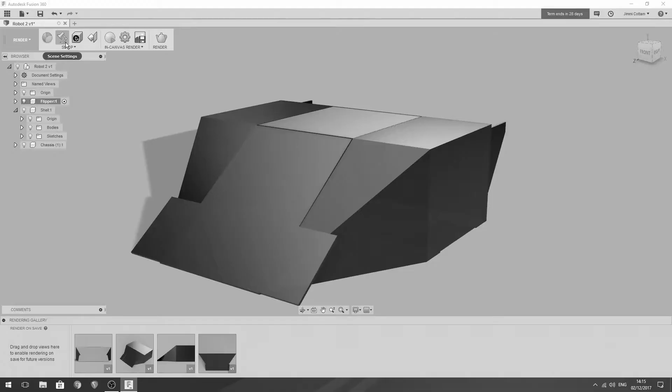Robotic Idiotic was initially created to showcase me designing, building and fighting a Beetleweight fighting robot, and then committing my failures to YouTube. I am, or certainly was at that point, the very bottom of the rung. I had no experience in electronics, very little in mechanical design, and Robotic Idiotic was trying to show anyone that building a robot is easy, or it can be if you know what you're doing.

If we roll back to 2018, regular followers will know that I competed in the European Beetleweight Championships set up by Kinematic Event. Those of you that watched that series know I spent a dismal 12 seconds in the arena against a very powerful horizontal spinner called Spinzer. Of course, the oil barrel armour didn't really stand a chance.

At the end of the very last video in that series, there was a teaser: Volta will return. In January 2019, I started to act upon that. I bought some HDPE, some 10mm thick stuff, and some new wheels - new, grippier, better, easier to use wheels. There is more than one, I'm not just going in one wheel.

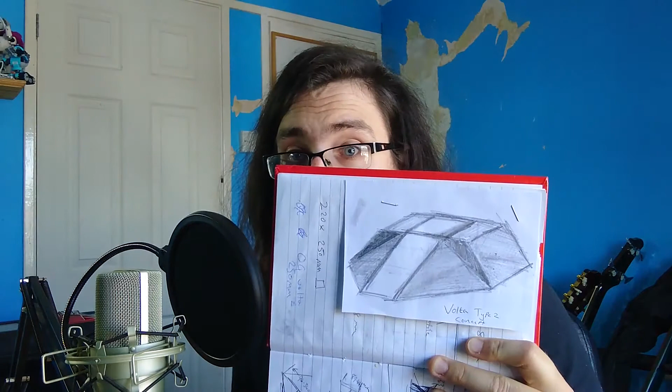Being locked down with no events coming up that I could reasonably get to, and with quite a lot of other events being cancelled this year, I thought I could at least have a decent crack at redesigning Volta, ready for when events do pick up.

In 2018, my limit was October of that year. That was my deadline to get a robot up and running, and although it didn't really work, I did get it into the arena with the help of some very friendly roboteers.

But with this design, I haven't really got a time limit to work towards. I just want it finished, hopefully by next summer. It's kind of like a soft time limit - I'm not aiming for anything in particular.

Now, as we know, Volta was poorly designed originally. I sat down with Fusion 360 to plan it out before I actually build anything. I don't really want to go into making something on paper and it not working when we get to the actual building stage. Ballsing it up is something that I'm quite good at.

That's what we're going to talk about in this episode - how I designed, or redesigned should I say, the new look Volta.

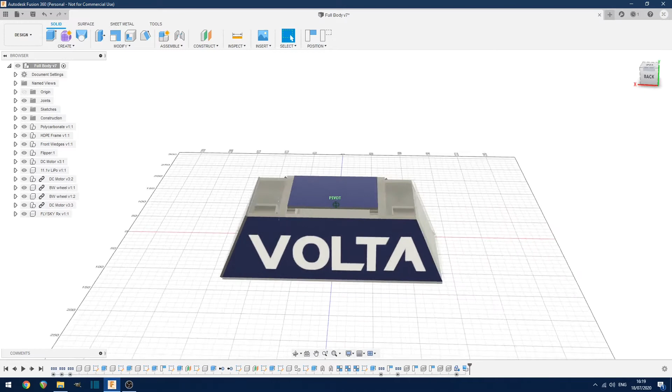This is how Volta looks in accordance to our new, more interesting design sketch that I did in the notebook. It's a little bit rough, it's not 100% amazing, but I wanted to redesign it so I knew all the components fit on the inside first. But we'll go through it and I'll show you how it came to fruition.

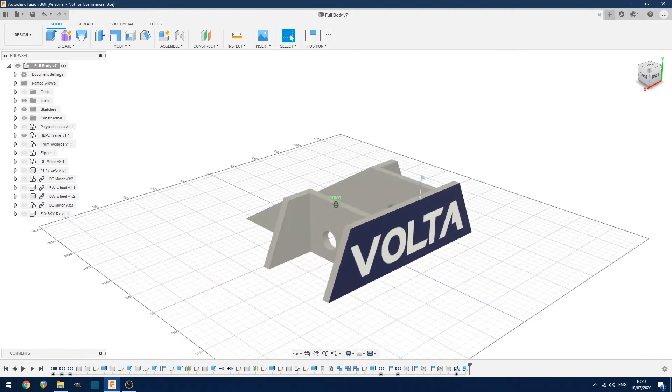Okay, so this is the initial skeleton. These are the HDPE parts that we are going to cut out first, with all the relative holes for adding in the motors and the back of the hinge for the flipper.

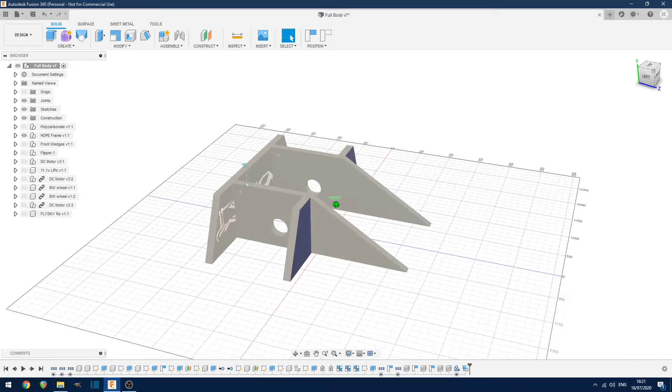As you can see, I am opting for a more angled sort of design. Original Volta was very slab-sided, which didn't really help. It's a little bit wider, but it's still kind of roughly the same design, if a little bit tweaked.

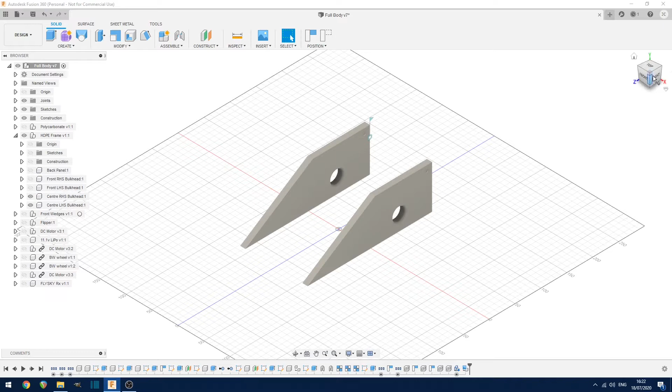I did like the look of Volta initially - it reminded me of a very old school Robot Wars type of competitor. So I designed all the parts first, and they are all individual, so I can actually take away each section and show you a bulkhead by itself. So that's where the motor will sit.

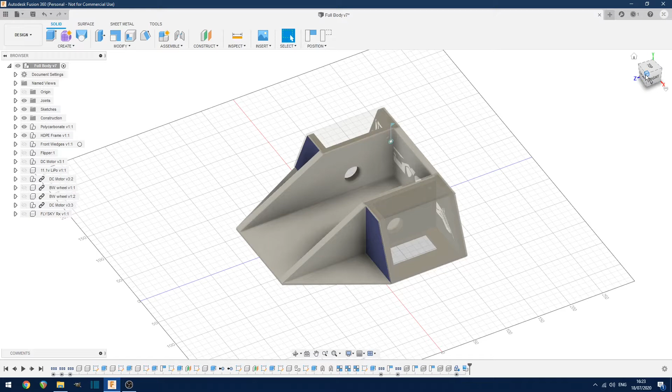The next part, when this was all done, I could add the polycarbonate with the intention of adding polycarb to the side. So we're going to have a nice clear view of the wheels, and we're also going to have LEDs running on the inside to illuminate it from the inside out as part of the power light that we have to have in accordance to the rules. I've got some 3mm polycarb, which is apparently good enough.

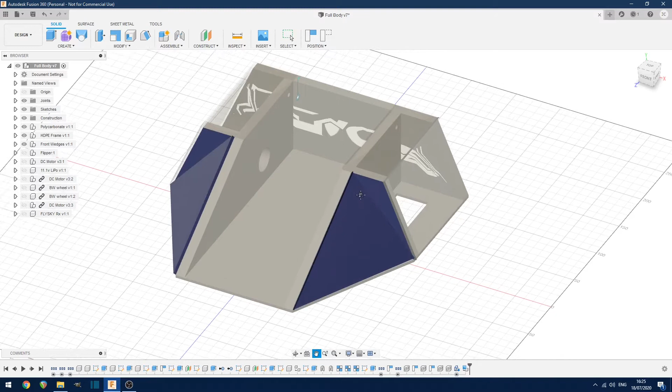The chassis is pretty much identical to the chassis from original Volta. That's going to be 3mm thick polycarb as well. These might be a bit problematic because I'm kind of uncertain how they're going to attach to the HDPE on the sides and to the chassis. I think I might use, again, 3mm HDPE, maybe a bit thicker if I can find it. 3mm is what I went for in the design here.

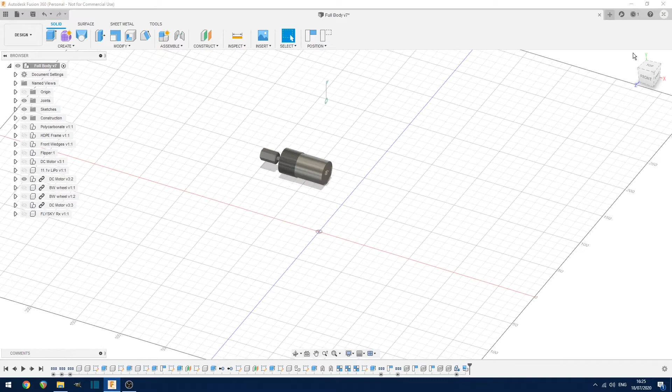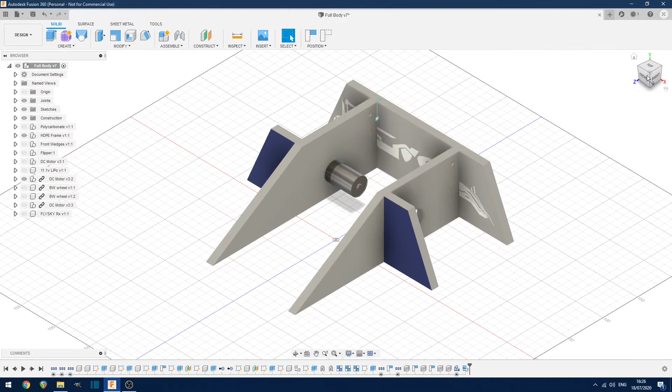Another important thing to talk about - I actually mocked up the DC motor and the hub that I bought, which we'll talk about in another video when I go through the components. I know you can probably find them online, but I did this - I remade the motor to put into our model to make sure that they fit together in the HDPE. So there is actually another one somewhere too.

That gap between the two was a problem, which is why it ended up being a little bit wider. Oh, that's how it looks with the wheels that we've got.

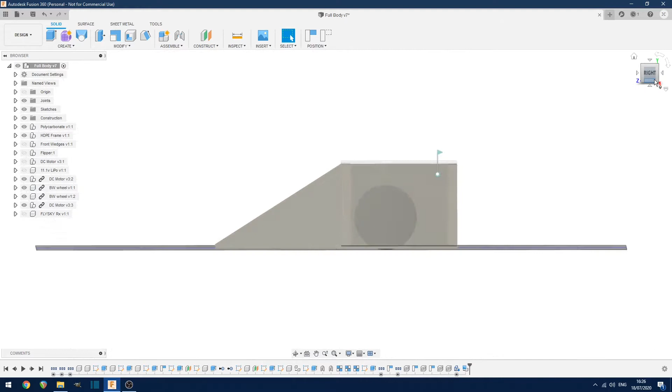With the polycarb, it was important for me to know how high I needed the wheel to ride off the ground. So if everything goes according to plan, when we print out the sheet to apply to the HDPE for me to cut the right size out, the wheel should sit perfectly enough to give enough ground clearance while still keeping the wedge nicely planted to the ground.

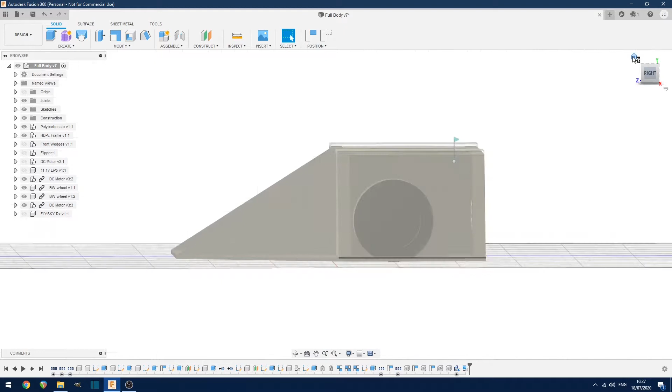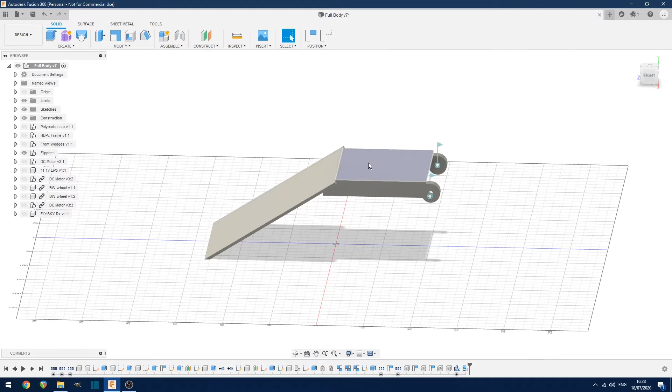Hopefully, anyway. So for the flipper, when we buy the 3mm HDPE to go on the front wedges, we're going to use the same stuff for the top as well. The 10mm stuff will be used to make the flipper arms that the top panel will sit on and be screwed into. And this front panel here, I'm hoping we can get some proper metal, not an old barbecue.

I'll see if I can find some titanium for a proper wedge, depending on how much weight we've got left over. If it really does become a problem, then I can probably get away with some more HDPE. I would like a proper metal flipper - if I'm fighting spinners, that will be the first thing to go, so it's going to have to be properly armoured.

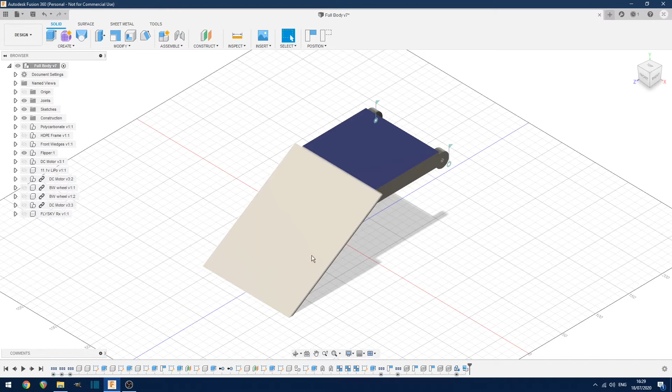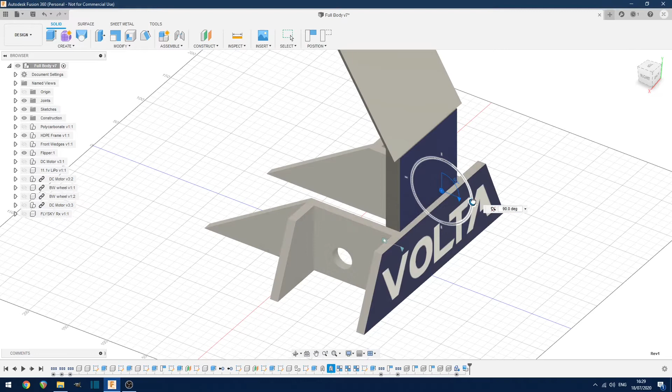Fits in like this to the chassis, which explains the gap, because check out these Fusion 360 skills. We can articulate it to open up, and I needed to do that because I needed to know how much clearance we needed at the back. It should open up fully with that gap - but this is something that we can change at a later point.

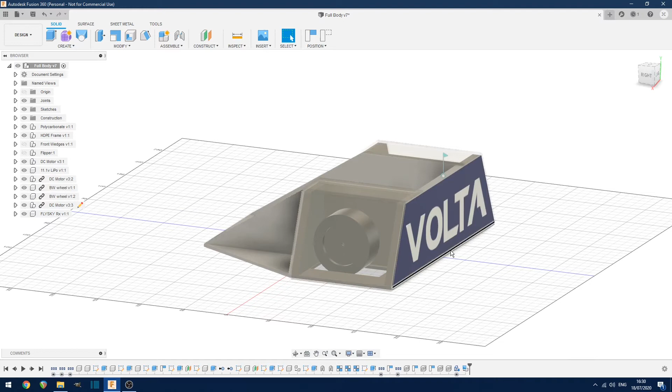So in there we have the weapon motor, the LiPo, the receiver, and the two 12 volt motors. Then we'll add in holes at the relevant time for things like adding wires to our LEDs and the removable link. Everything else I'm kind of confident will fit in there. Considering I've bought a new LiPo that is quite compact, I think we're off to a pretty good start.

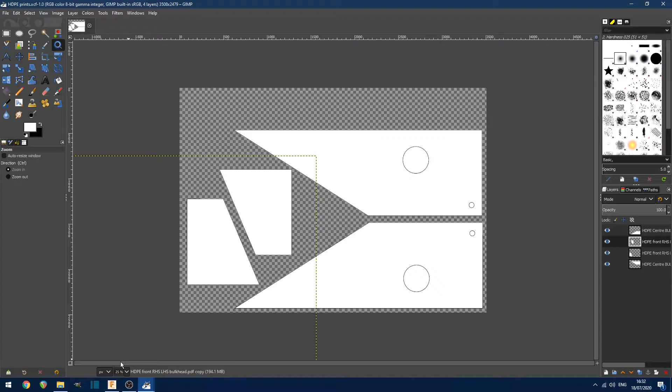So initially we are going to cut out all of the HDPE parts. I have already rendered down the individual parts to a PDF and put them into photo editing software, so when we print out, the lines will show up for me to create a cutting guide.

Each part for the HDPE has been mapped out, ready for cutting. And if I follow these guides, it should be accurate to our 360 model.

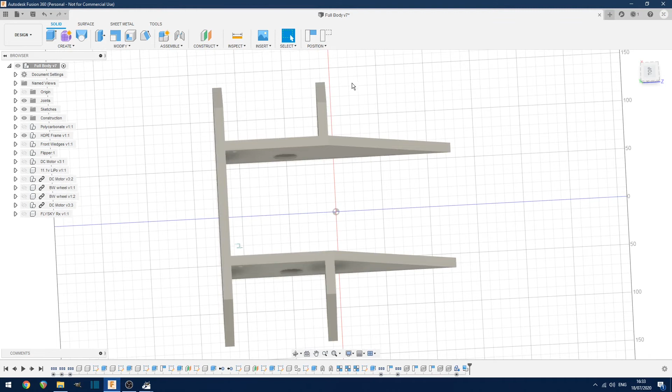And then we're going to get some big screws, attach the bulkheads to the back panels, and then these to the bulkheads. It's more in line with how I've seen other people build Beetleweights, and especially compared to my original design, I think this way is a lot more in depth. I think it's going to be a lot more successful.

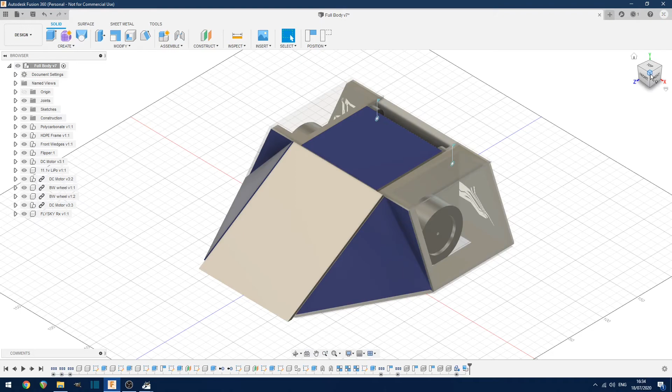Using better materials, I've actually sat down and planned what I'm going to do, and I think we will be okay. The main idea is to last longer than 12 seconds - if I last longer than 12 seconds, then that's a winner in my eyes. But it would be nice to last an entire event at least.

The CAD is quite basic in mechanical terms, but to make our cut list for the parts for the HDPE it's been quite useful. I have uploaded pictures onto the Team OTT Facebook page, which is why there are 2 versions in one picture - one of them was just slightly too small, so I had to go back and redo it to make our motors fit without touching, creating a dangerous short should that ever happen. I kind of wanted to avoid that, so we made it a little bit wider.

All that we really have to do now before we start cutting up the plastic is to print out the cut sheet, apply it to the plastic, and then get the jigsaw out, which will probably be a few steps down the line. I think next time I will go through some of the new components that I've got.

I don't know, maybe we'll give them a test - we'll make another test reel like what we did with Another One Bites the Dustpan in the previous Beetleweight build diary.